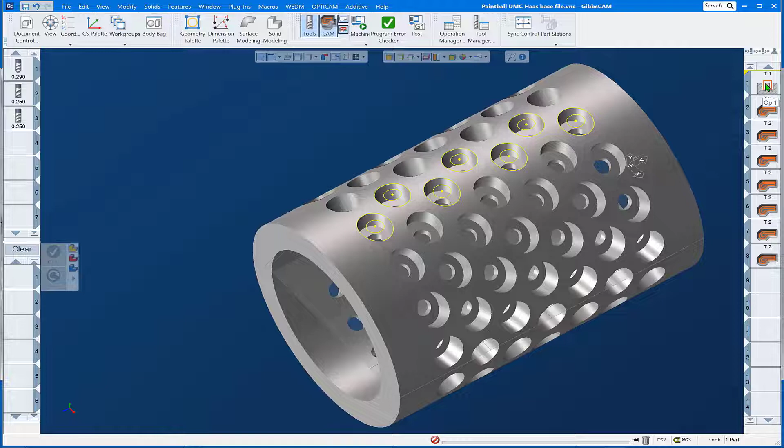Hello and welcome to this GibbsCAM Tech Tip on Transforming Toolpath. We're looking at a rotary encapsulated die here that we need to do some repetitive toolpath on, and then rotate it around this part to complete the operations we need to perform.

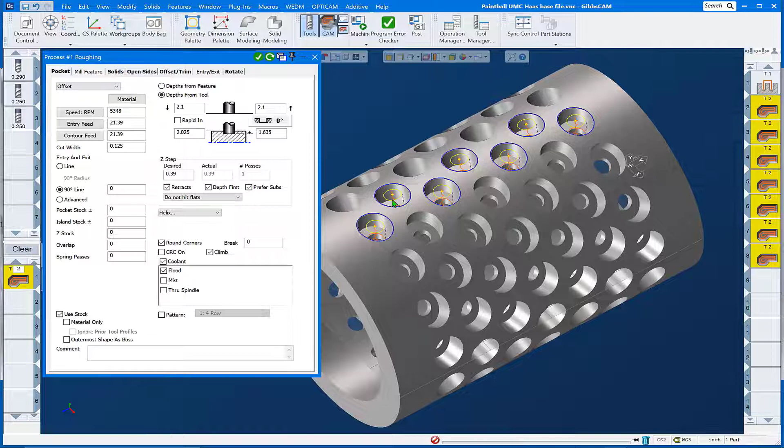So looking at this, we have a simple drill routine running down this row of 4 and back up this row of 3. And we also have a roughing pocketing routine that's doing the same thing. Down the row of 4 and back up this row of 3. And there's actually 13 instances around the part.

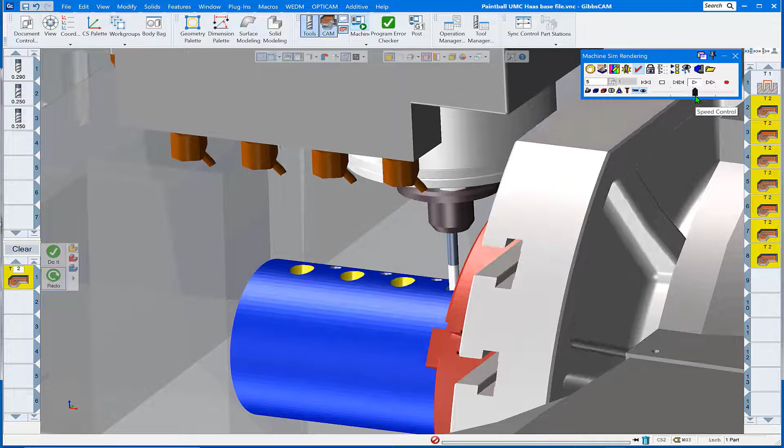So let's take a look and see what this looks like in cut part rendering. We got our Haas UMC 750 set up here. And we'll go ahead and do a render start. And we can see that it drills the 7 holes right in the manner we want. And now we're pocketing down a row, back a row, just what we need. Okay, well, let's get this populated around the whole part then.

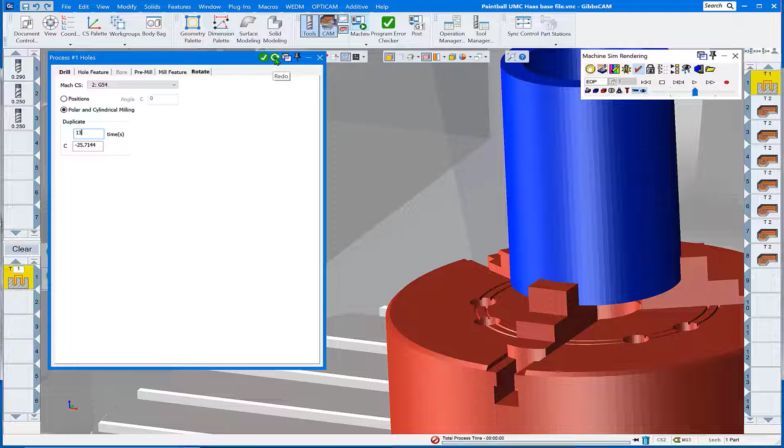First off, we'll do the drill routine. We're just going to come in here under the rotate tab, tell it we want 13 instances of that at this angular displacement, and give it the redo button. And it updates that process and operation over there on the right. And we'll do the same thing for the pocketing routine at 13 more instances at the same angular displacement. Say redo it. And the rendering updates.

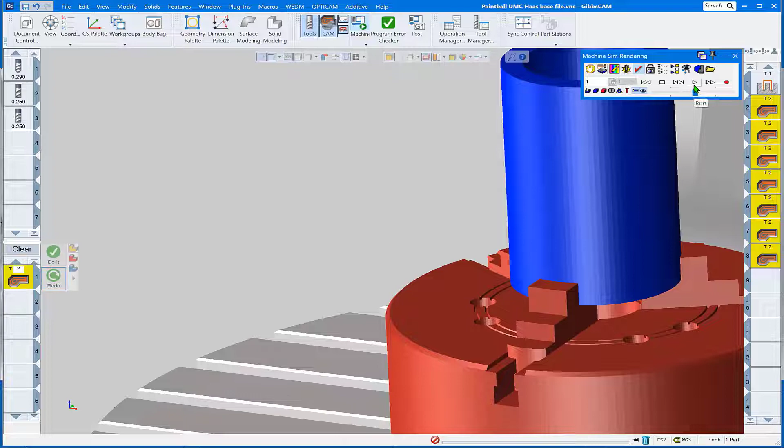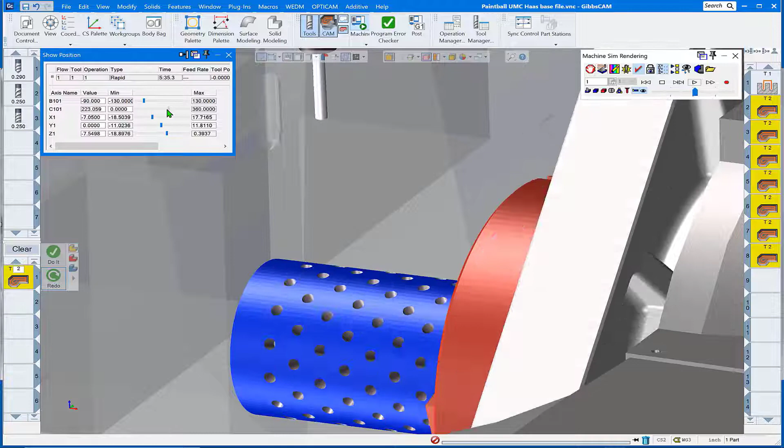And let's rerun the rendering. The play button here. And bada bang, it knocked out all the drill routines. Let's take a quick look at what we got here. We open show position, we can move the Z-axis head up out of the way and rotate the C-axis around to see what we have. And yes, we covered all the start holes we were supposed to on the die.

Let's go ahead now and run the pocket routine. Well, that is not quite what we were hoping for. What it's done is taken the operations over on the right hand side and done exactly what we asked it to and repeated it 13 times at that angular displacement around the part. That's not quite the toolpath we were hoping for. So let's undo that. Let's set this back to 0 and do a redo of that.

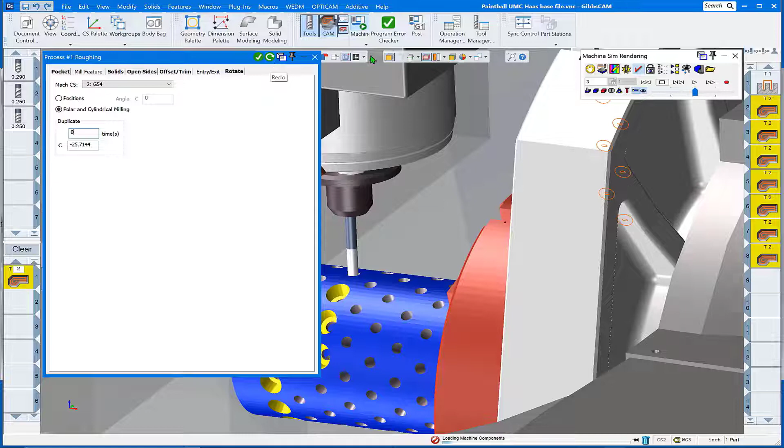It updated the rendering, and before we start the rendering, what we want to do is transform the toolpath. Tip of the day. We have these operations all highlighted, and we're going to transform that toolpath into Plugins, Toolpath, Transform Toolpath. The Transform Ops dialog comes up. We have the ability to translate either in HVD or in a rotary fashion, which we're going to do today, around an HV center at our angular displacement we wanted.

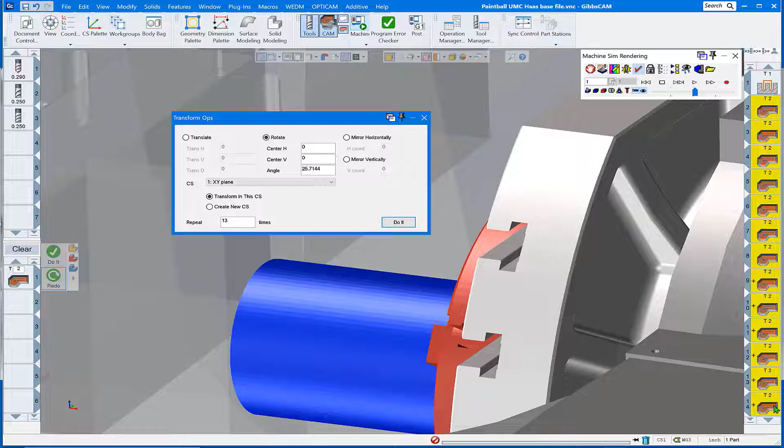From the XY plane, we're going to transform in this CS 13 times. We'll do the do it button. And sure enough, we had our additional transformed operations over here on the right. And let's run a render and see what we have. Here we go with our pocketing, and there we go. Down the row of 4, back the row of 3, second instance down the row of 4, back the row of 3.

So there you have it, Transform Toolpath, one of those easy, quick tools in GibbsCAM.